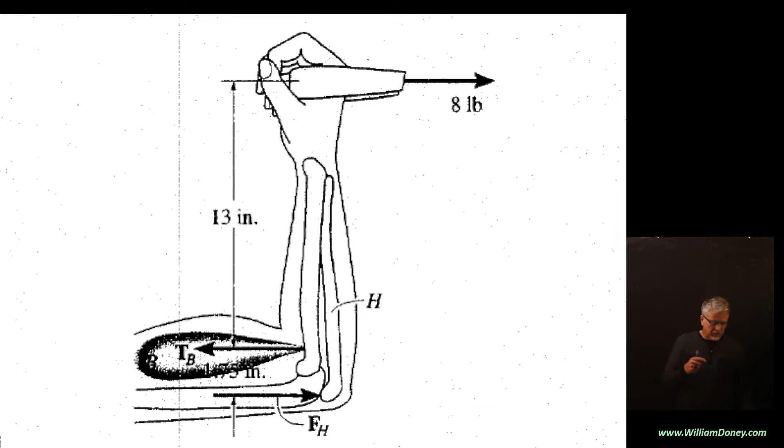Let's look at this problem. First thing we want to do is a free body diagram. I've already started that for time. I have this being the forearm, here would be the elbow joint, there's the force H on the humerus, I'll call that point B, there's the tension of the bicep pulling back, creating basically a lever here, and there's 8 pounds pulling that way. Even though the person is pulling 8 pounds this way, what the arm feels is 8 pounds the other way, by Newton's third law.

So what do we do? Whenever we get stuck, we want to sum forces and sum moments. We've been talking about summing moments being the key that opens up summing forces, because we have 2 unknowns right now, so we need at least 2 equations. We don't have anything happening in the y direction, so really this is just summing forces in the x and summing moments.

Let's start here with summing moments. We're going to take counterclockwise as positive, and sum moments about point B, which is kind of the elbow joint. We can treat that as a pin - it allows rotation, so there's no moment set up, but it does prevent translation, so there'll be a force in the x and the y. All right, so what am I going to have here?

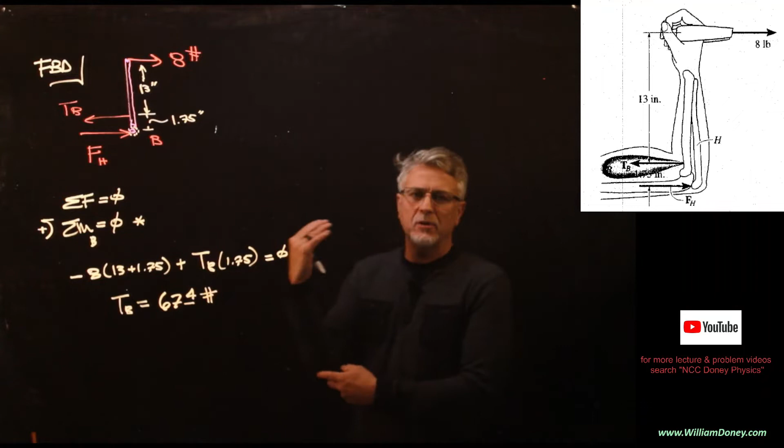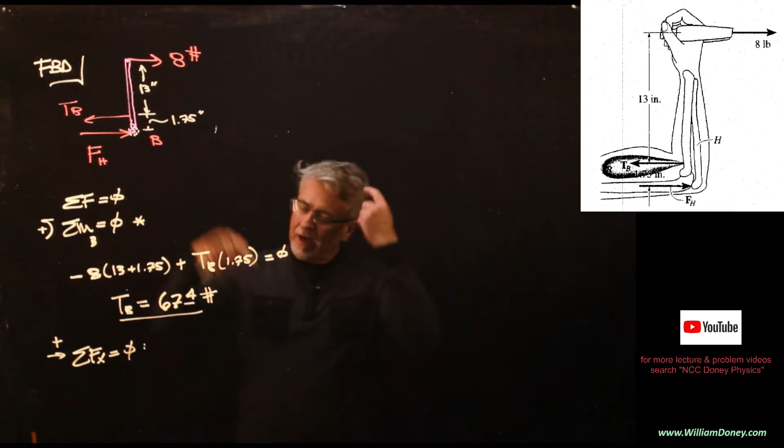We can then use that to do sum of forces in the x direction, with positive to the right. We don't worry about the y direction, there's nothing happening there. So I will have 8 minus the tension in the bicep, which I just found, plus the force H in the humerus has to equal 0. That comes out to force H equals tension minus 8, which becomes 59.4 pounds.

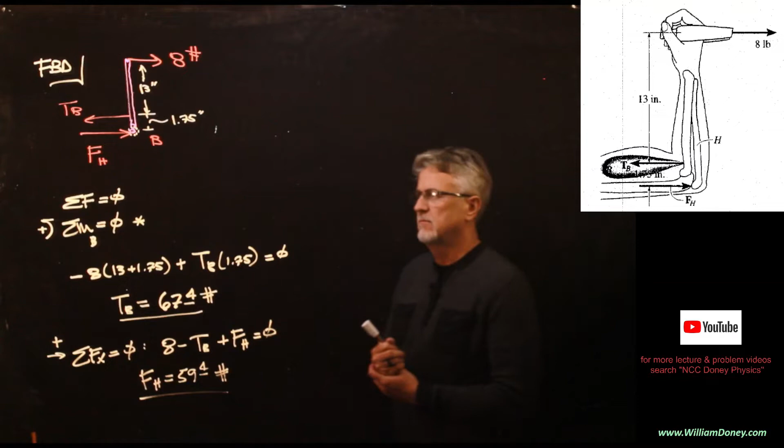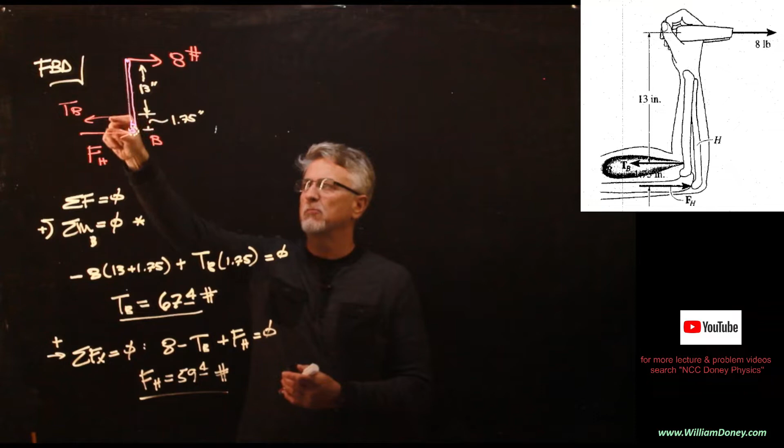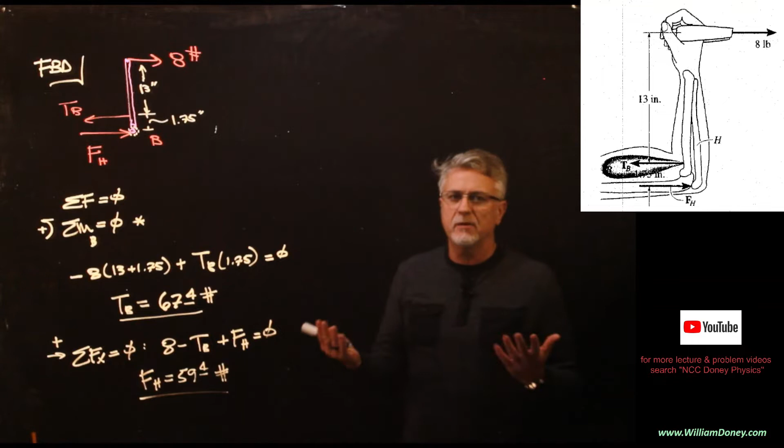59.4 pounds, and that's basically a pivot there. Obviously, if moment this way equals moment that way, since this is at a shorter distance, that has to be a much stronger force versus an 8 at a further distance. It's really counter versus clockwise, and that works out there. So that's a quick problem. Again, summing forces, sum moments - we typically look at summing moments first to clear that up.

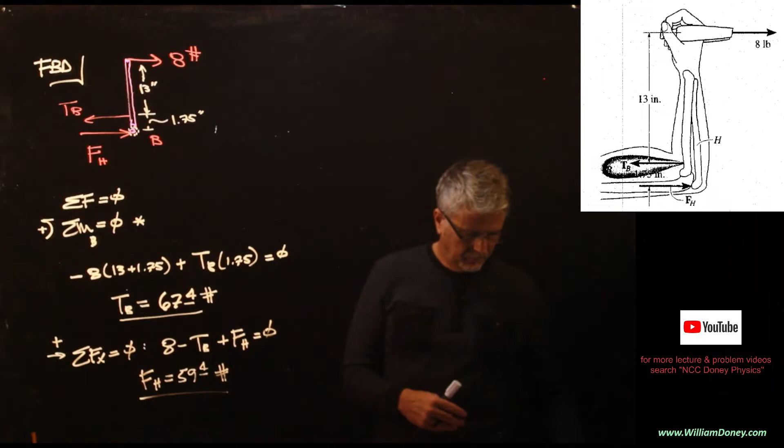Okay, we're back. We have a third problem here. We're going to have a wrench used to tighten the bolt at A, at the origin. If a force of 6 pounds is applied to the handle as shown, which is 30 degrees above the negative axis, determine the magnitude of the resultant force and moment that the bolt head exerts on the wrench.

The force F is parallel to the XZ plane. So when I ask for the magnitude of the resultant force and moment that the bolt head exerts on the wrench, really what we're finding is the support reactions at A. Since that's a bolt, we're going to look at X, Y, and Z for forces, and we'll look about X, Y, and Z for moments.

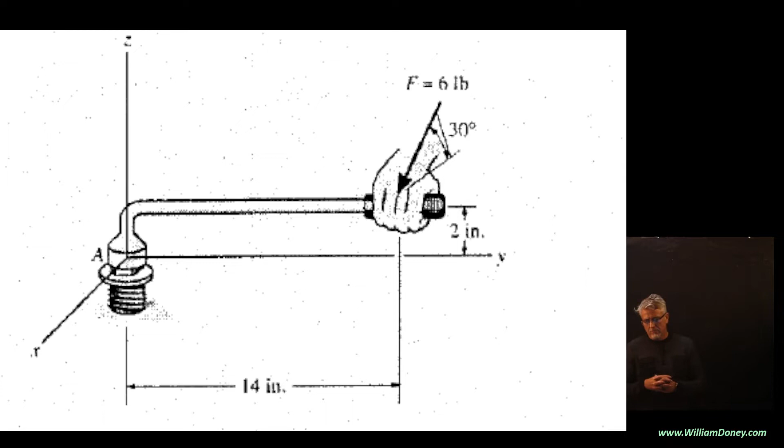Now, an older way of doing this would be to switch this up here - R cross F, this force - that would give us the moment in I, J, and K, and that would answer our moments about X, Y, and Z. That's one option. It doesn't really give what we're doing in the X direction, although we can build that force into X, Y, and Z. That's a little different solution than normally summing forces. But let's try that, okay?

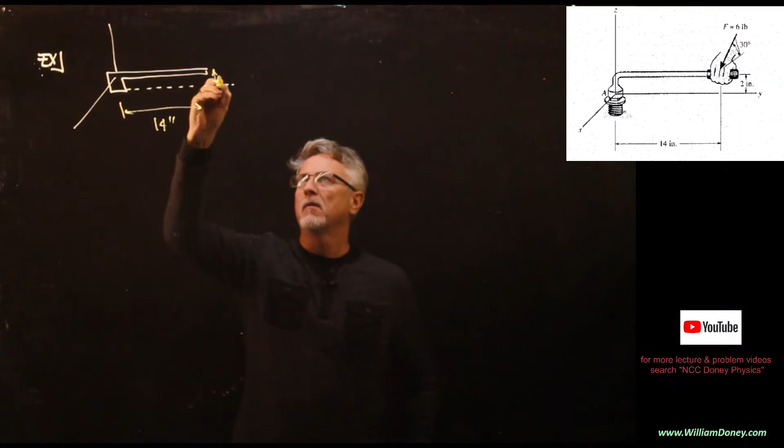Quick little free body diagram. So 14 inches, and there's - I think that's actually above. There's the Y. There's 2 inches.

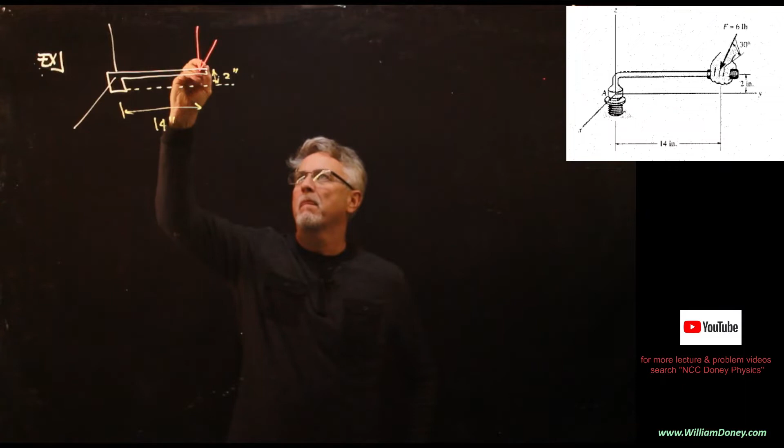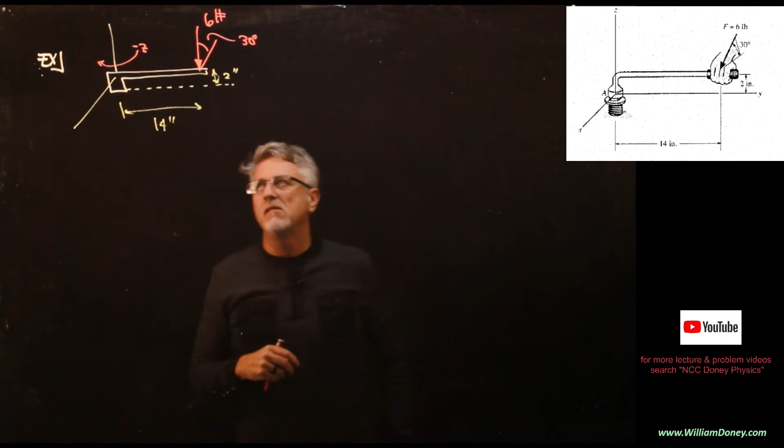And we have the force that is going to be in the same direction as the X, and that's going to be 6 pounds at an angle of 30 degrees. So that's going to try to cause some rotation this way. If that's the positive Z, positive would be this way, so that's actually in the negative Z direction. But that is trying to tighten the bolt. So if you look down from the top, that'd be a righty-tighty.

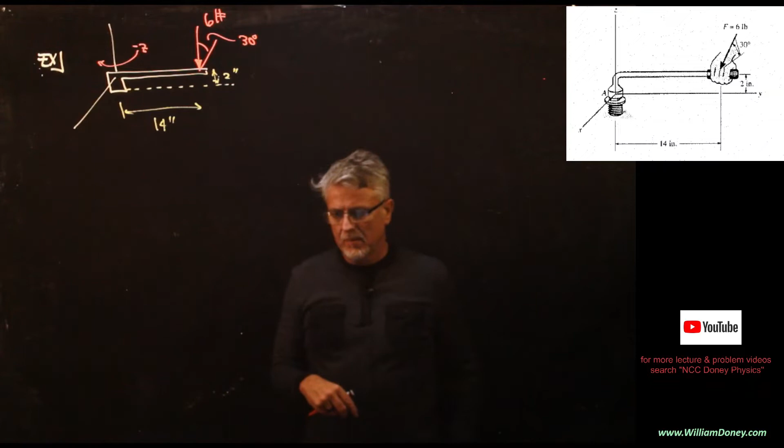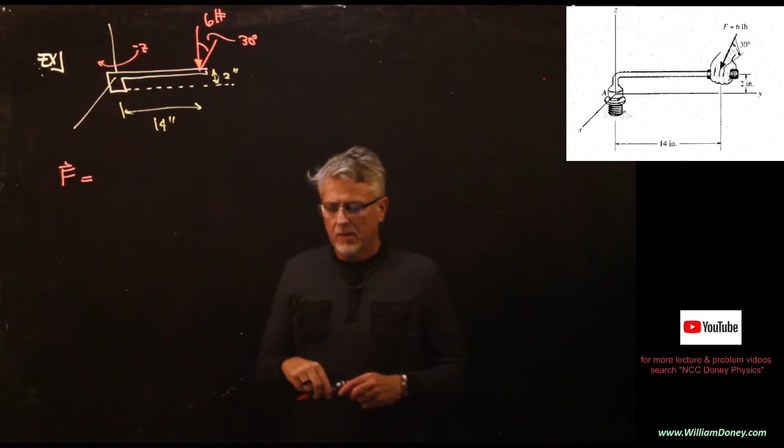So let's go through and see if we can put this force in Cartesian vector form - that's going to be I, J, and K. Let's build that: 6 cosine of 30 in the I, 0 in the J because everything is lined up with the x-axis, and negative 6 sine 30 in the K. If I go through, 6 times 0.866 is basically 5.20, and that'll be negative 3, in pounds.

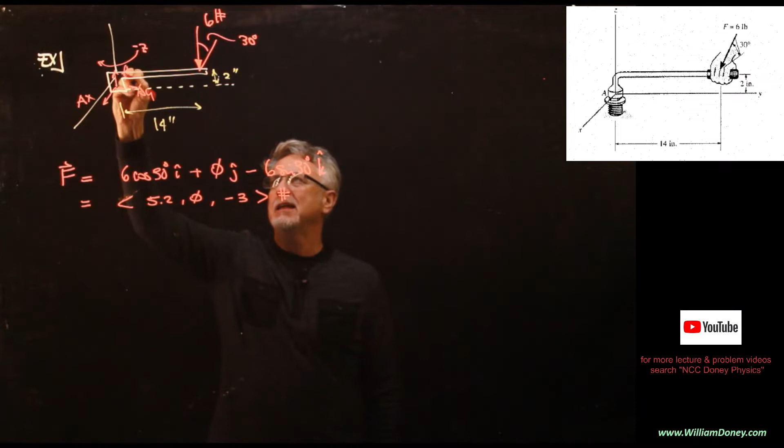Now, since that's the only force acting here, when I sum forces in the X, Y, and Z directions, what's happening at the bolt gives me AX, AY, and AZ - they have to be equal and opposite to those. So pulling these numbers out, AX is going to equal 5.2 pounds, but in the opposite direction. There'll be no component in the Y direction - nothing there. And in the Z direction, it has to oppose this negative 3, so that means I have to have 3 pounds, and that would be up. That's a pretty easy way to get those answers if there's no other forces acting.

Now, I could just say sum forces in the X, and I'd have AX plus this 6 blah blah blah equals 0, and I get that answer. So this is just an alternative way of doing it. Let's see if we can do the same thing with the moment.

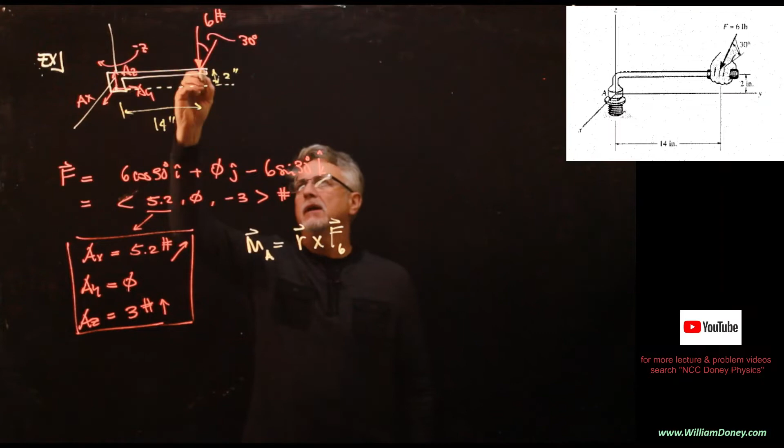If we find the moment at A as R cross F, that's the 6, and we're crossing that with going from - let's call that point B maybe - that's going from A to B. See if we can build this right off the bat: I, J, and K. Position vector is going to go from coordinate A, which is 0, 0, 0, to coordinate B, which is 0, 0, 2.

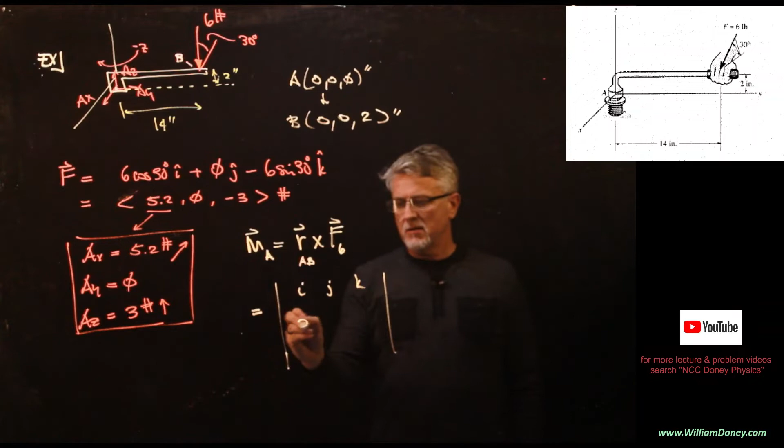So I'm going to have 0, 0, 2 here. That's the position vector, and the force vector - if I build that, the x direction is going to be 6 cosine of 30, there's a 0, and 6 sine of 30. Again, I'm just doing R cross F. That'll give us the moment straight off.

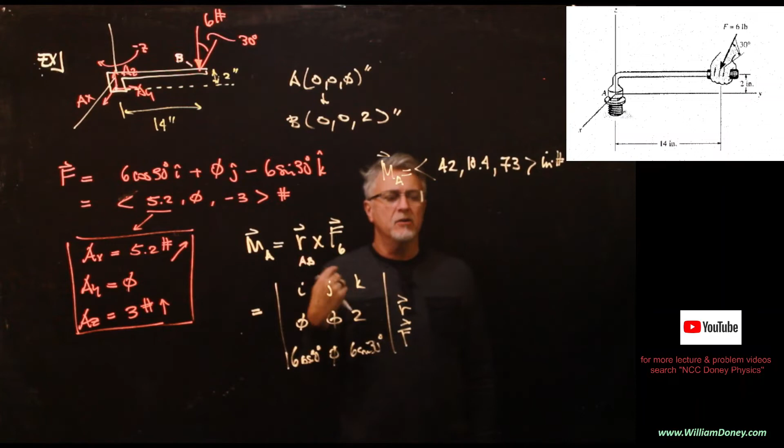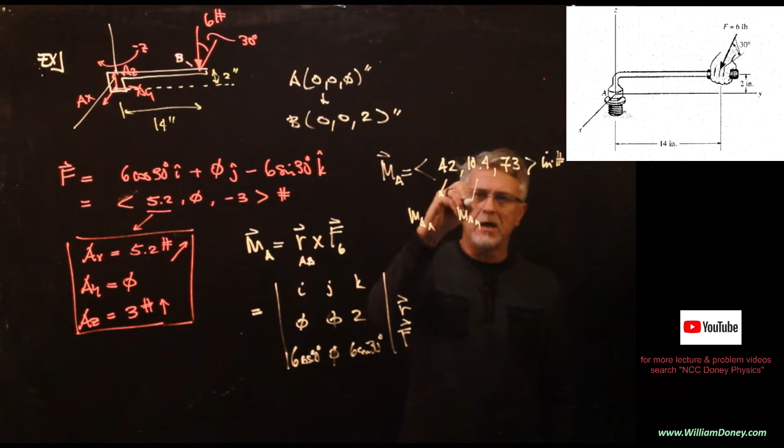If I go through and get the moments at A, let's see those numbers real quick: that should give me 42, a little over 10 - 10.4 - and 73, and that's in inch pounds. Now that gives us the moment in I, J, K Cartesian vector form as a three-dimensional vector. If we're looking for the moment individually in each of those, we just set it equal to each: that's going to be the moment at A about the X, the moment at A about the Y, and the moment at A about the Z.

That doesn't give us the actual magnitude of the moment acting there, but if we take the square root of the squares, that will give us the magnitude of that moment at A if we need to find it. The question originally asked for the magnitude, and this gives us the support reactions at that point A, at the bolt. If we want to know the magnitude, we square them. If we know the magnitude here, we do the same thing, and then we can also find that. That would come out to be 6, because that's what that force is.

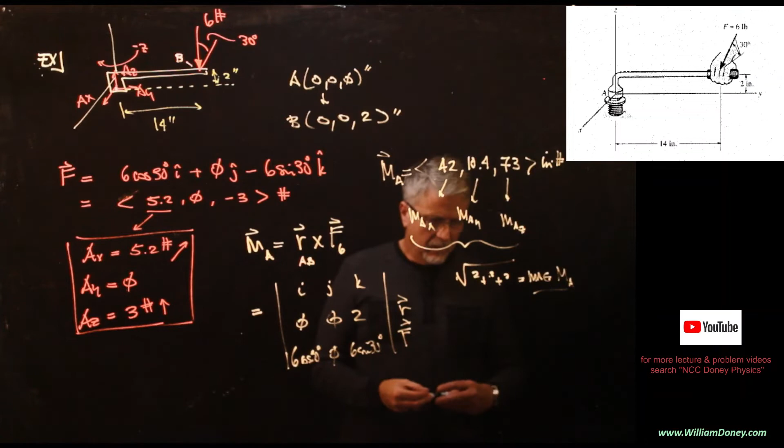All right, another one, something different. We haven't seen a truss. Let's pause the screen and clean it off, and we'll be back to record another one.

Okay, we're back with another example. Again, these are just great practice questions for the exam. As I'm sure I've said in class before, the only way to get good at this is to do problems. You just have to keep doing problems and recognize that the way the problem looks doesn't change our approach. We always do a free body diagram, always sum forces, sum moments. That's the whole semester, right? The only other part is if we see forces in a different way, we have to build the forces, but we do sum forces, sum moments. So force yourself to practice when you get ready for an exam. Cover up the solution, force yourself to at least start the problem so you know how to start it, and then the math will fall in later, okay?

So here we have a truss. It's pinned over here at A. We're told there's a roller happening at B that's at some angle, a 45. So we're told to determine the horizontal and vertical components of the reaction at the pin A and roller B required to support the truss. Set F equal to 600.

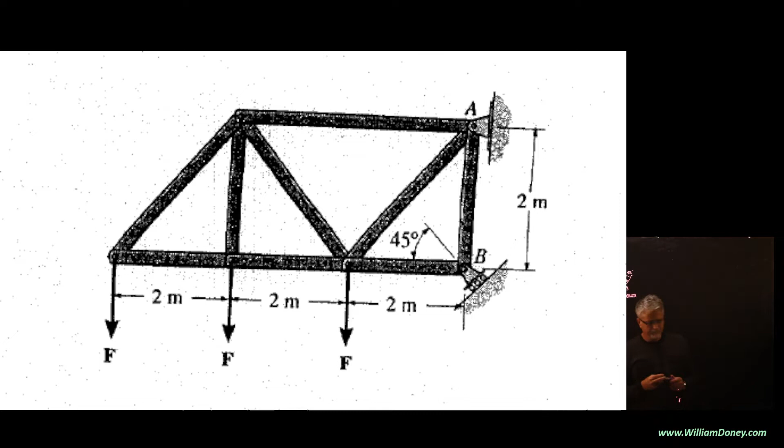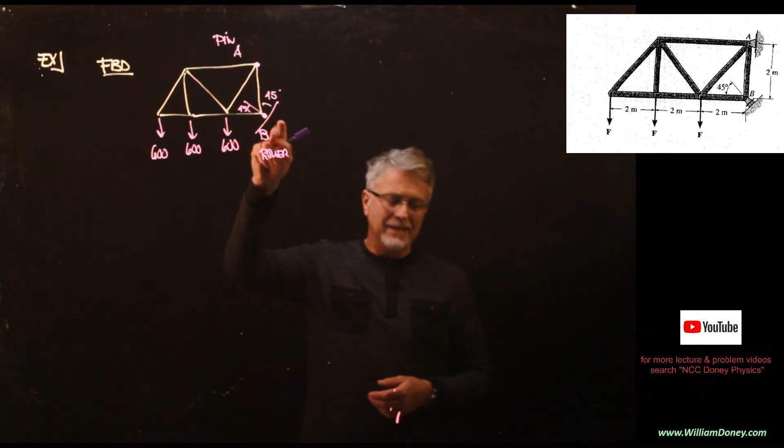All right, so there's our problem. I've made a free body diagram, or at least started one, by showing the loading. I've shown the roller at the angle here at B, and we have a pin at A. At this point, we want to go ahead and draw in our reactions, or support reactions, at A and B.

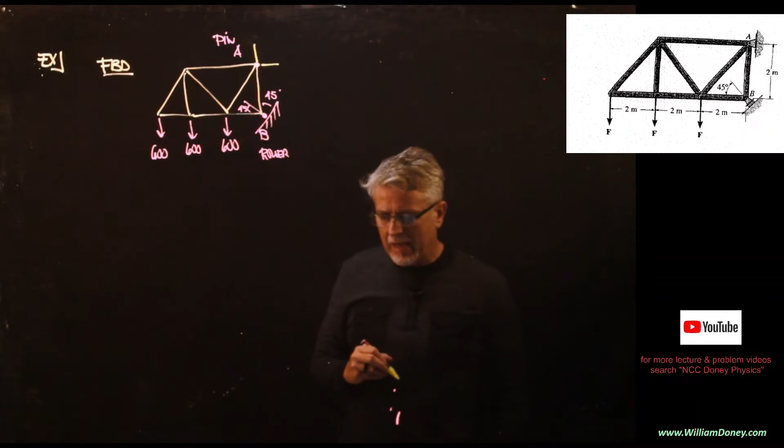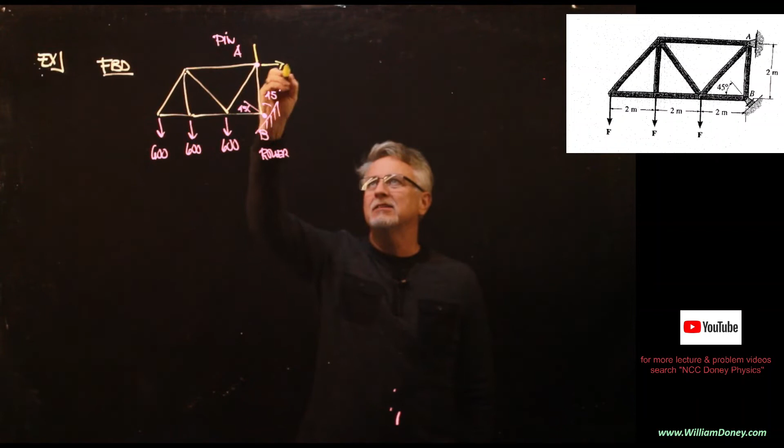Since it's a pin, it's going to have components in both the X and Y direction. We may want to look at that and say, do we need a certain direction to it? Well, I'm expecting if this would pivot, it would pivot this way, so I expect AX is going to try to be holding it back in that direction. Also, I'm expecting maybe this one would be up—I'm not sure, it could be down. If it goes this way, it's more helping it pivot. We can just pick AY as this because we're not sure of a direction. Again, as we've said before, if I pick the direction wrong, no worries—the answer comes out negative. I just switch the drawing and put in the answer. No big deal. So I could always just pick positive AX to be able to start the solution.

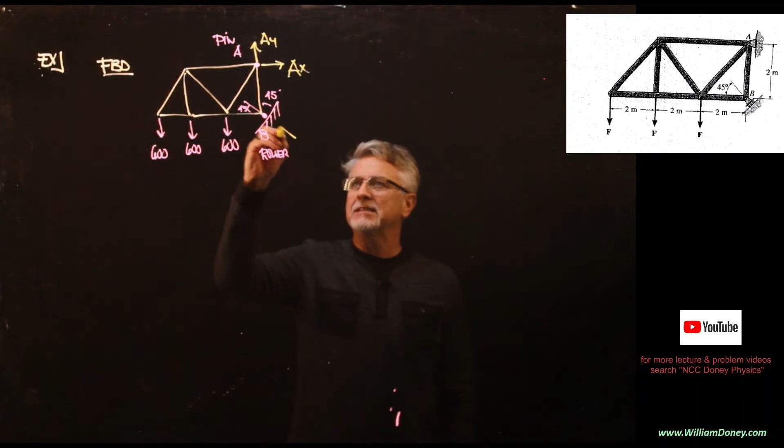Now, what about B? Well, it's at an angle, but there's going to be a normal at B, so it's not really a BX and a BY—we'll just call it a normal at B. That way it's only a single variable, as opposed to an X and Y that would give us two more variables and 4 total, which we can't have in 2 dimensions. That's going to be at a 45-degree angle there, and we can solve that.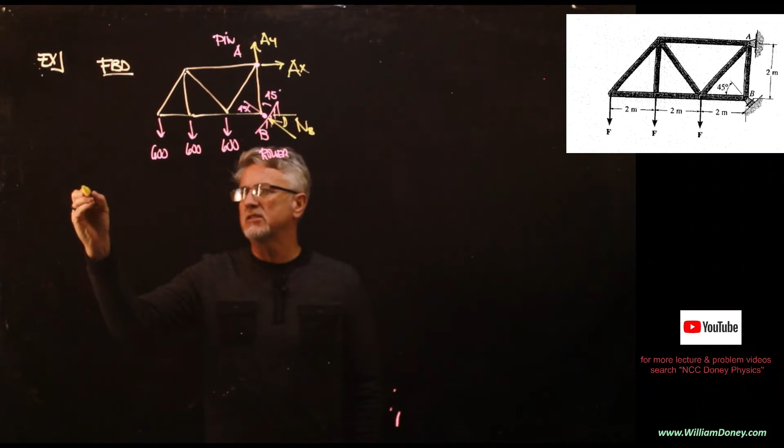All right, so here on, we just go ahead: sum forces, sum moments. I'm going to start by summing moments counterclockwise, because that usually unlocks the X and the Y. Where do we want to pick? I could pick B, which gets rid of B, or I could pick A, which gets rid of A. It really doesn't matter—let's pick A up there because it does drop out 2 at the same time.

So I'm going to take the moments at A. That's going to give me a 600 acting at the total distance across, which is what? This is a 2, a 2, and a 2.

So that's 600 times 6, plus 600 times 4, and the other one is 600 times 2. That takes care of the loading.

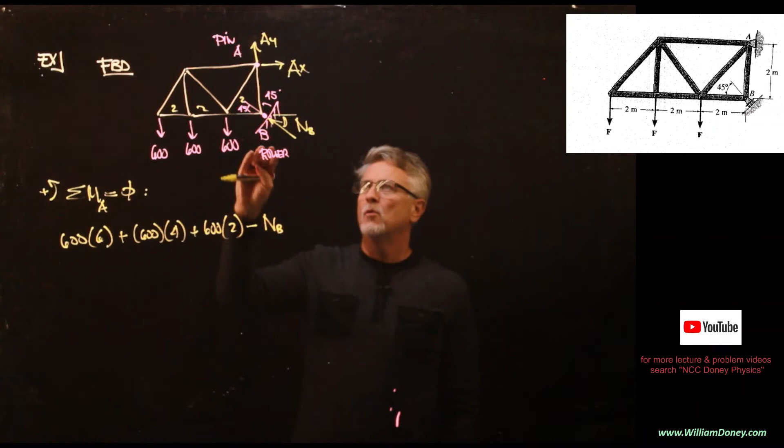Now we have the normal at B. We have to put it into the horizontal direction, so that's going to be cosine 45, right? That gives us the X component there, and that's at that distance of 2. If I check the drawing, that's also 2. And all that has to equal 0.

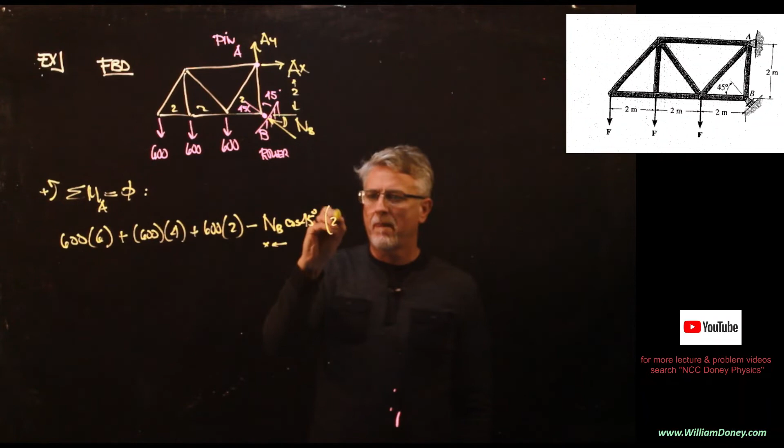If I go through, I'll get the normal at B. Comes out to be about 5092 newtons. Now, I would leave this in newtons and not switch it to kilonewtons, only because all our original loading was in newtons. So we traditionally will follow that and put all our answers in the same units.

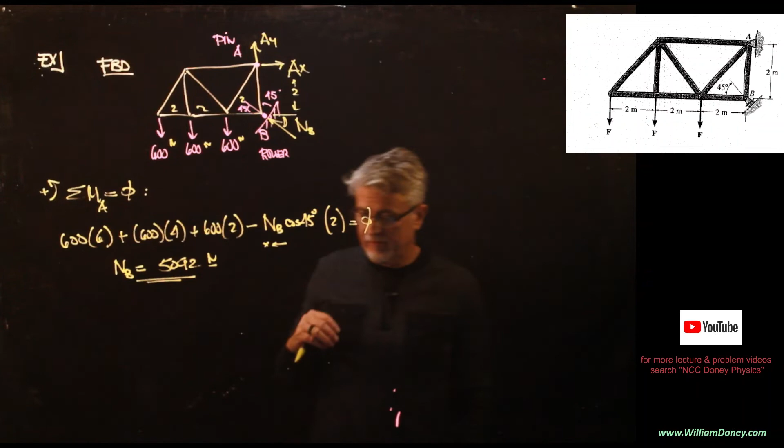All right, summing moments I found out what's happening here. I just need to know what's happening at A. So I can go ahead and sum forces in the X direction equal to 0. I'm going to get AX.

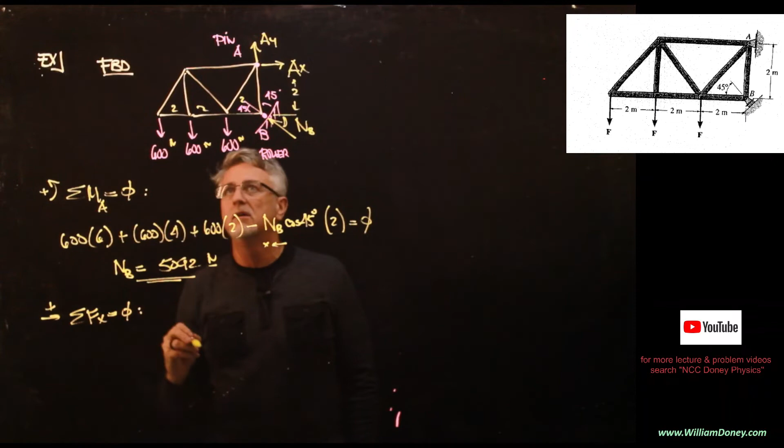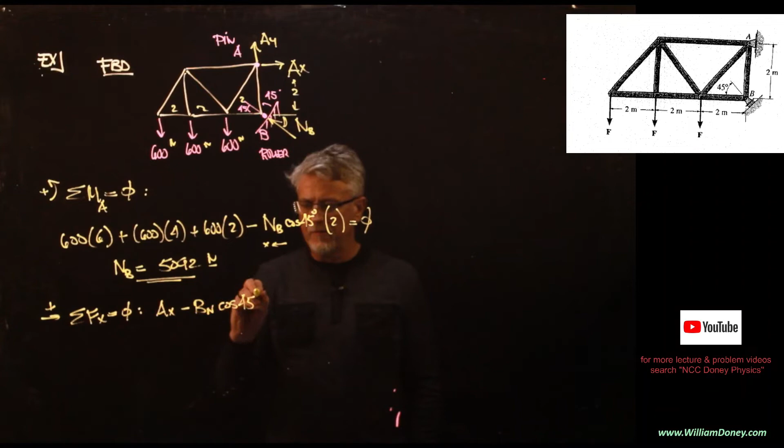AX is going to be minus the normal at B, NB, BN doesn't matter, times cosine of 45. That's going to equal 0. That gives me AX equal, if I take 5092 times cosine of 45, that gives me 3600 newtons.

And then if I just go ahead and finish this off by summing in the Y direction equal to 0, I'm going to get AY up plus the normal at B sine of 45, that's also up, equals 0. So I'm going to get AY.

Wait, I'm missing something. Hang on, that didn't sound right. AY up and B up. Oh, I forgot the minus 600s. That's huge.

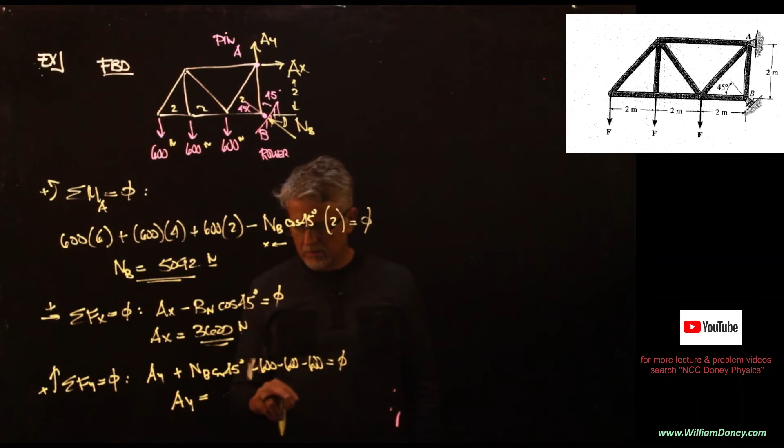That will equal 0. That gives me an AY, if I go through that, of... 5092 times sine of that, gives me 1800 newtons.

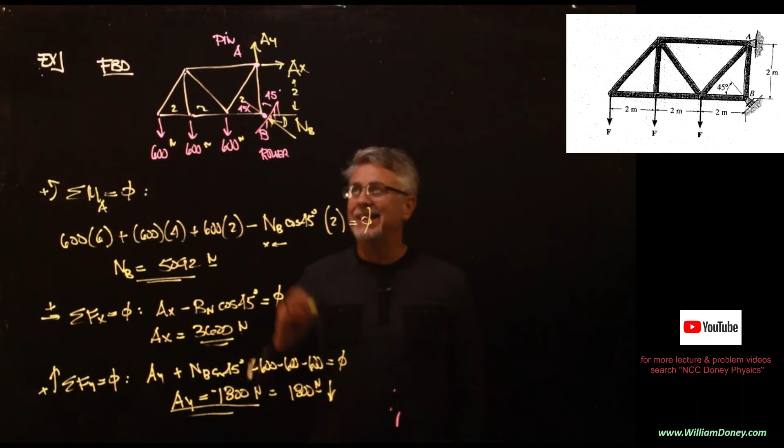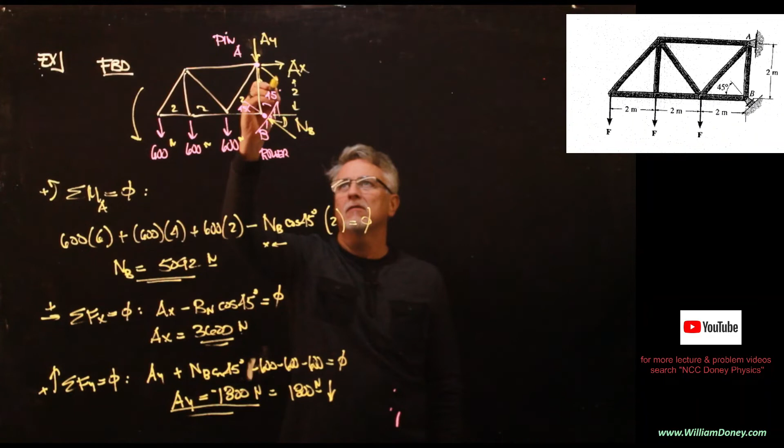And that also comes out to be negative, so I have to change that to 1800 newtons, and that's going to be down, because the answer was negative. It doesn't seem intuitive by looking at that, but instead of pulling this away, it's actually pushing down, because these are trying to spin it this way. And this one, the combination of these two, sort of gives me a result, and this way it's trying to spin it clockwise.

Okay, all right, so that's another good one there. I think I have one more for you, so let's pause it, erase the board, and we'll be back in a moment with one more.

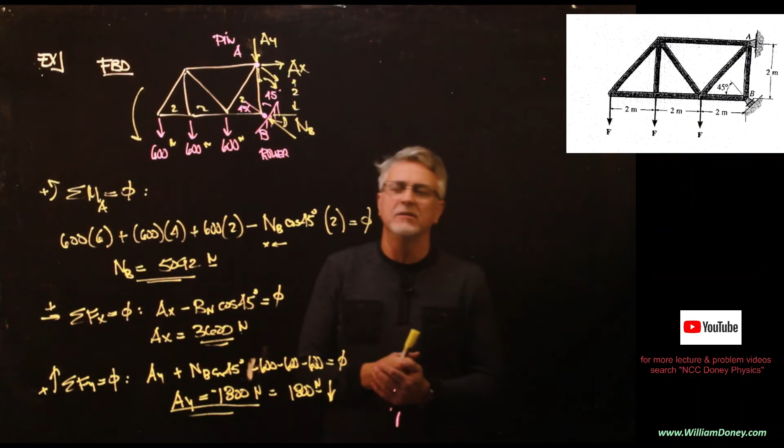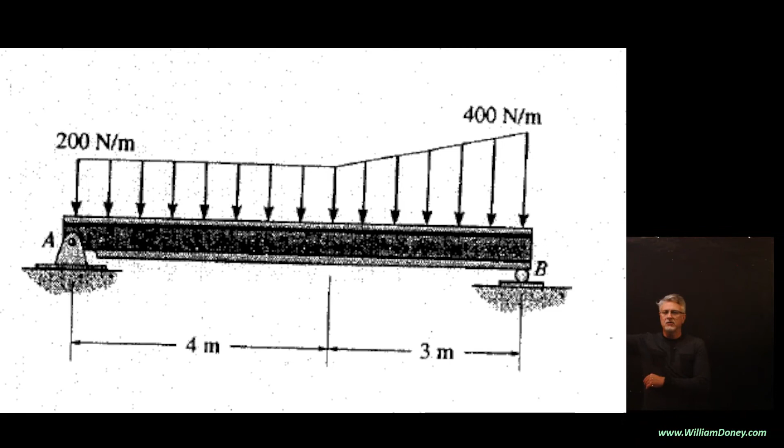Okay, we're back with our last problem here on Chapter 5, some additional problems to work through. We have a beam with a distributed loading over a length of 7 meters. It looks like it starts at 200 for 4 meters and then ramps up from 200 to 400 at the end above B. We have it pinned at A, and roller B is simply supported.

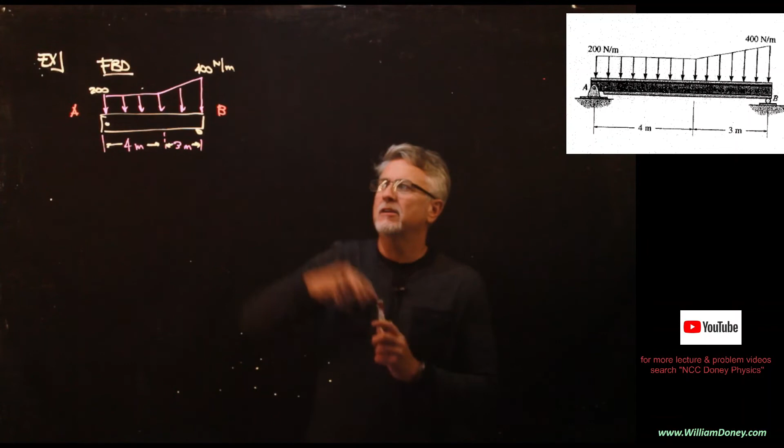Again, the roller allows any kind of elongation so it doesn't buckle or have any stress in it, based horizontally, and pinned at A. So how do we approach this problem? Distributed loading, we haven't seen that in a few lectures, but if you remember, we want to break that up into common shapes if we can, unless we can integrate it. I'm seeing some common shapes here: one is a big rectangle, and two is a triangle right there.

So to find the resultant force of those, I need to find the area of that rectangle. Length times width is going to give me 200 newtons per meter times a distance of 7 meters, gives me 1,400 newtons, right? Just check the units there. That is the resultant force of that loading all the way across.

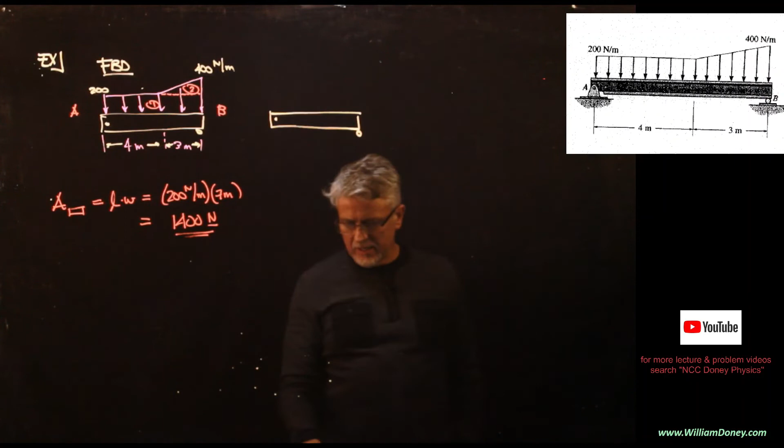So if I redraw this, there's the pin, there's the roller. I'm going to put that 1,400 and place it halfway across, so I'm going to put that at 3.5.

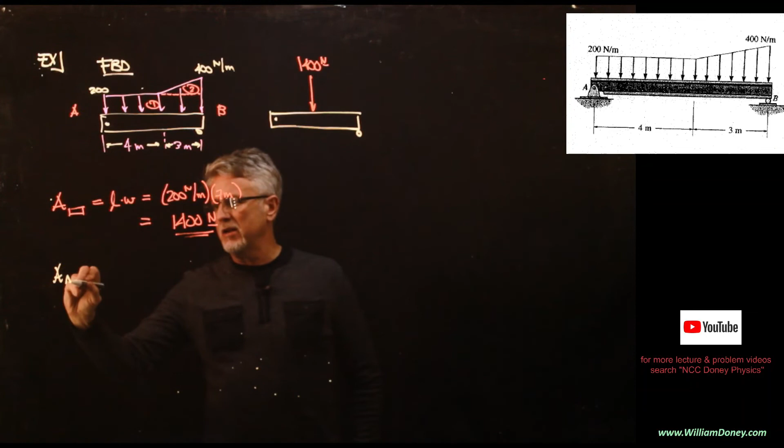And I have 1,400 newtons right there. Again, I treat that as a point load now, coming from the distributed load. If I go and find the area of that triangle, that's half the base times height. That's half the base, which is over 3. The height is going to be, careful, we have to use that height. It's not the whole height, we just use the height of the triangle.

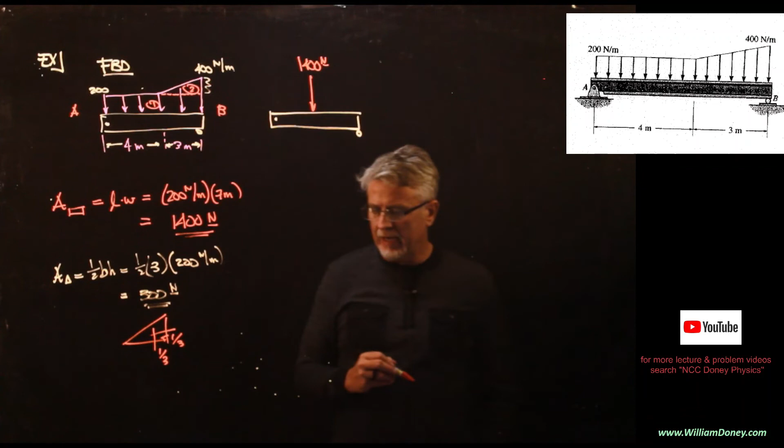So that's 200 newtons per meter, and that comes out to be 300 newtons for that. And that 300 newtons is going to be 1/3 in from the right angle. It's always 1/3 in, so that's going to be at 1 meter.

This one's at 3.5. That's at 1 meter. This is going to be 300 newtons. And what I've just done is replace the distributed loading with 2 point loads that have the equivalent of that distributed loading, and shows it acting at the centroid of those 2 areas.

Now, obviously, I'm still missing some parts of this. I'm still missing the support reactions. So let's put an AY in here, and we'll put an AX, and then we also have a BY at the roller. I could call this normal at B. Sometimes the book calls it normal B versus BY. Normal at B implies that it's vertical, perpendicular to the surface, but that works for us right there.

All right, so where do we go now? Well, nothing new. Our approach, now that we have the free body diagram, is to sum forces, sum moments. Again, I'm going to start out by summing moments. I'm going to pick point A, just because starting at the left end usually drops out the pin right away. It drops out AX and AY.

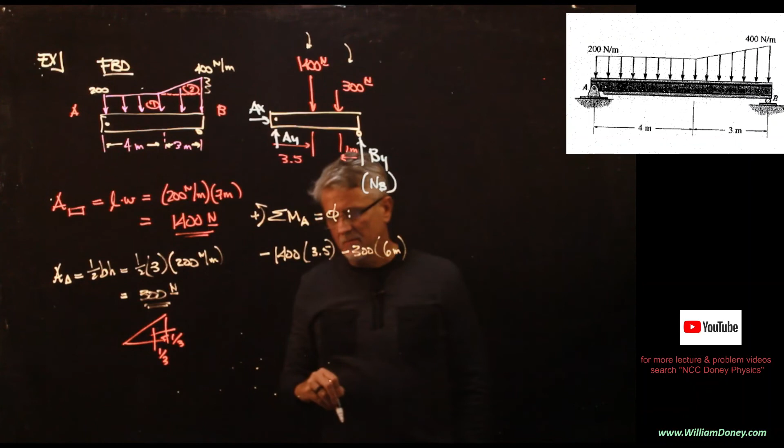So I'm going to have minus 1,400 acting at 3.5. It's going that way. I'm going to have minus 300 acting at a total of 7 minus 1, that's 6 meters. And then countering it, I have BY acting also at 7 meters. That all has to equal 0.

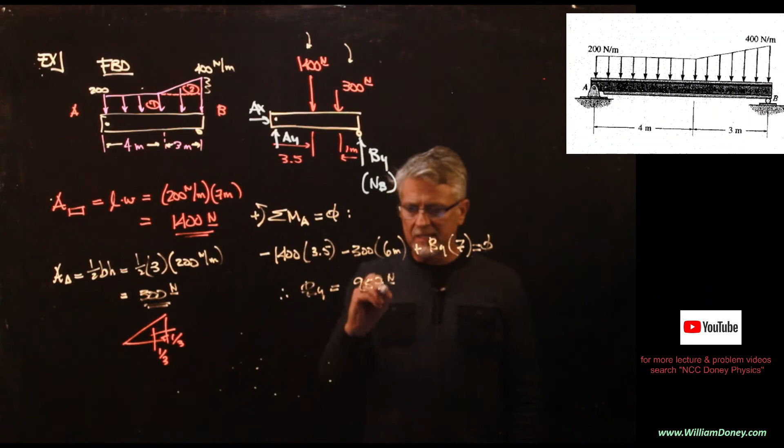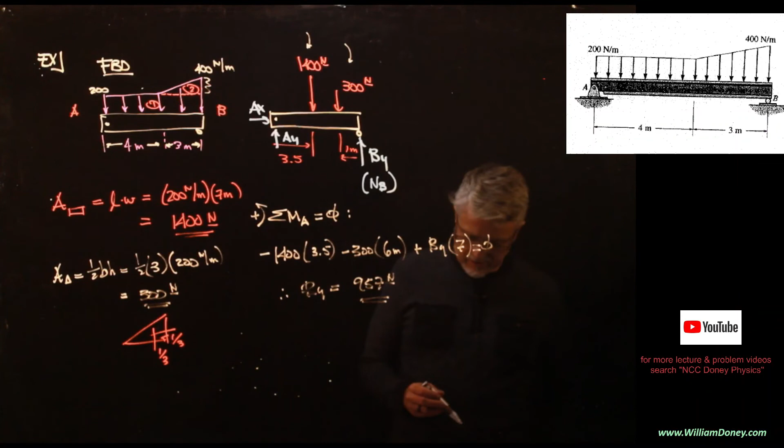If I go through that, BY is going to come out to be 957 newtons. 957 newtons. And that came out - let me get a different marker, I think it's running out on me here. Trying to find the cap.

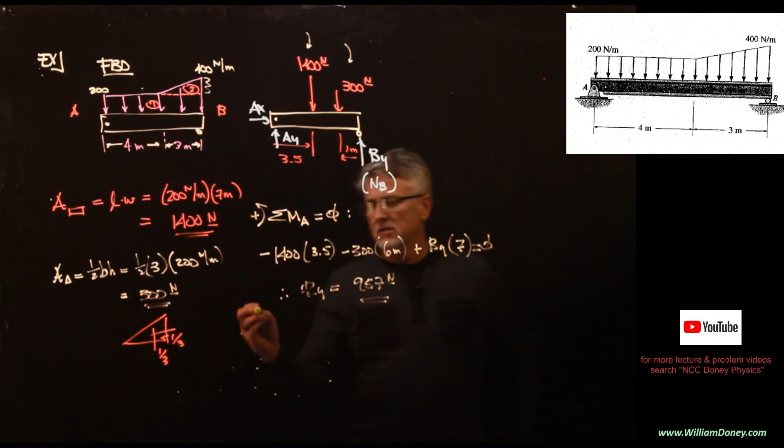All right, so that gets me a normal at B. What else do I have to find here? Well, I have to find the reactions at A. So I can sum forces in the x direction equal to 0, positive to the right. I'm going to get AX equals 0. No surprise, these beams are set up to handle vertical loading, not horizontal. Even though it's 0 there, doesn't mean we get rid of it. We still keep it pinned in case things would change.

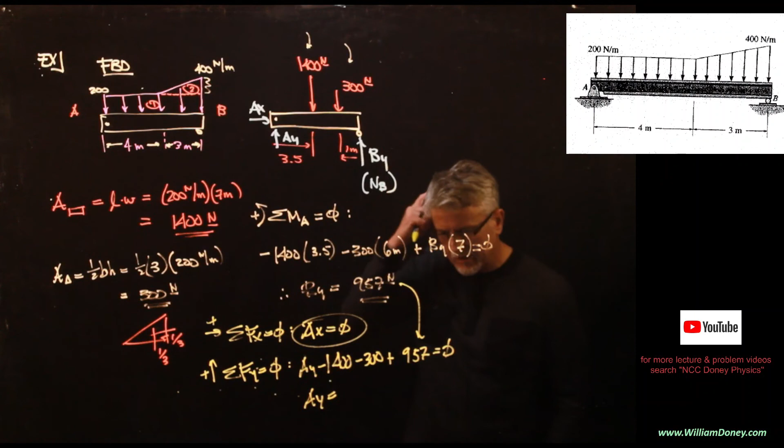And then I finish up this problem by summing forces in the y direction, positive up. I will have AY minus 1400 minus 300 plus the normal at B, the 957, that has to equal 0. If I go through that, that's 1700 minus 957, so that's 743 newtons. It's positive, so the direction I picked is appropriate. And that's what we have.

So let's do a quick check of this. I have 1700 newtons down. We have to hold 1700 up, otherwise this is going to translate down. It will not be in equilibrium. So by the combination of these two, AY and BY, the combination of these two should equal 1700. If I add those two together, I do get 1700. That makes me feel good about that answer. And because it's the pin, there's no moment set up. And that's the solution.

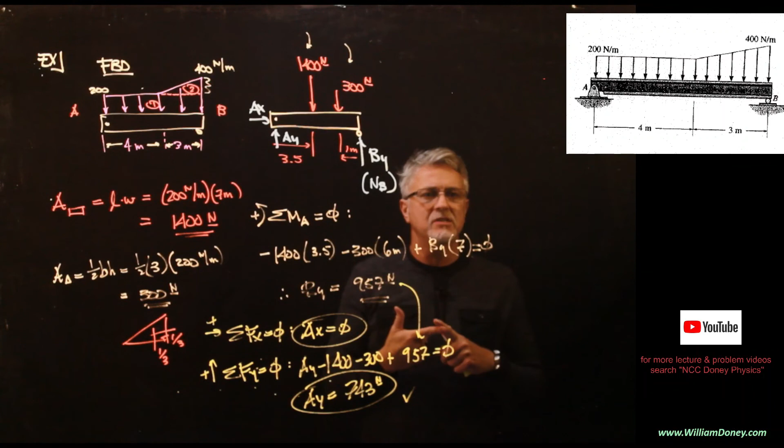And those should be some good practice problems for review of Chapter 5 material. Again, our process does not change no matter what the drawing or the object or the image or structure we're assessing or analyzing. We want to draw a free body diagram. From there, sum forces, sum moments, or sum moments, sum forces. Doesn't really matter. Sometimes moment unlocks it first, but it doesn't matter. Whatever works for you, stick with it. But it's the same process. You should never have no way of approaching a problem like this because we know after free body diagram, sum forces, sum moments. Okay? All right, so that finishes up Chapter 5.

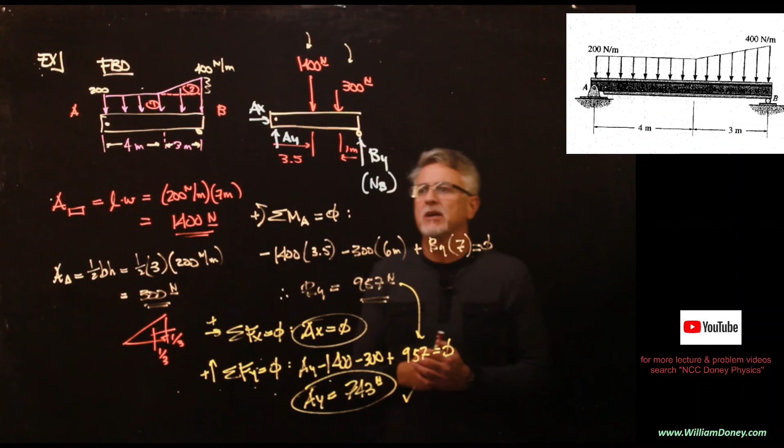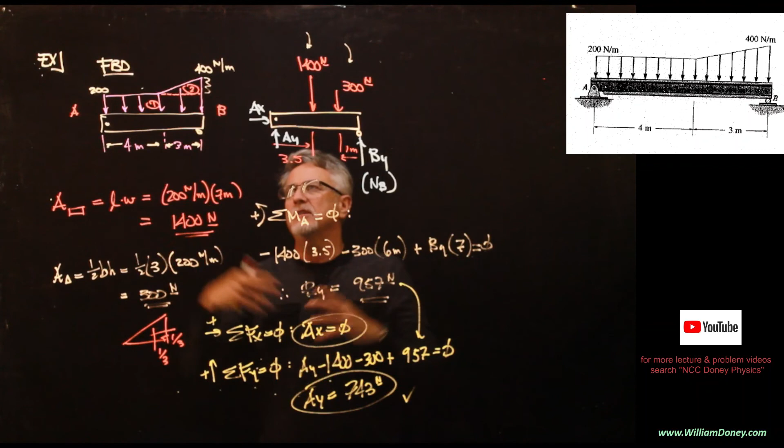As always, shoot me an email if you have any questions on these. Make sure you watch this, cover the solution and force yourself to redo or at least start this problem. You don't have to finish it all the way to the end, but at least start these problems so you know how to start them.